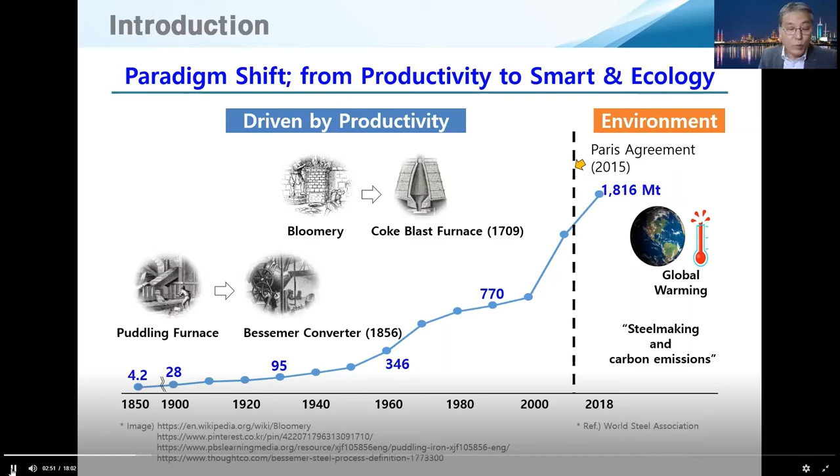Steel technology is facing the moment of paradigm shift. Definitely, environmental issues like global warming have become a crucial common issue. So what will be the innovation for the future in steel works?

Looking at the Korean steel industry, we are at the maturity stage. It is very difficult to find a growth engine for the future. In the Korean steel market, steel consumption is more than 1 ton per capita, the highest in the world.

Currently, crude steel production is about 71 million tons, but I think there will be no more growth in the future in terms of production capacity.

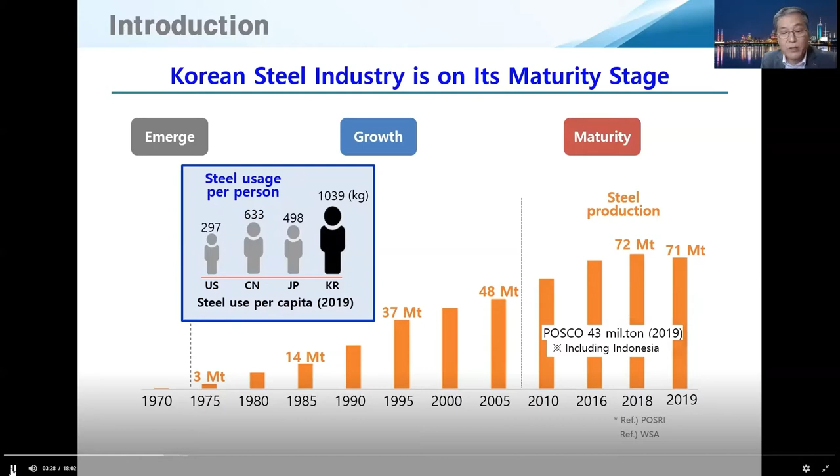In summary, let me tell you about 4 major challenges. Probably all steelmakers are in the same situation. First, global oversupply. Second, as I said before, we should follow environmental regulations to achieve carbon neutrality. And it is expected that the price of steel will increase when green steels come.

In safety, in spite of great efforts, the number of fatal accidents has not decreased significantly. Lastly, the baby boom generation are retiring, which means high-skilled operators or engineers are leaving soon. We are losing the know-hows in the workplace.

We need solutions that can solve all these problems, and smart technology can be one of them. That's the background of Smart Factory at POSCO.

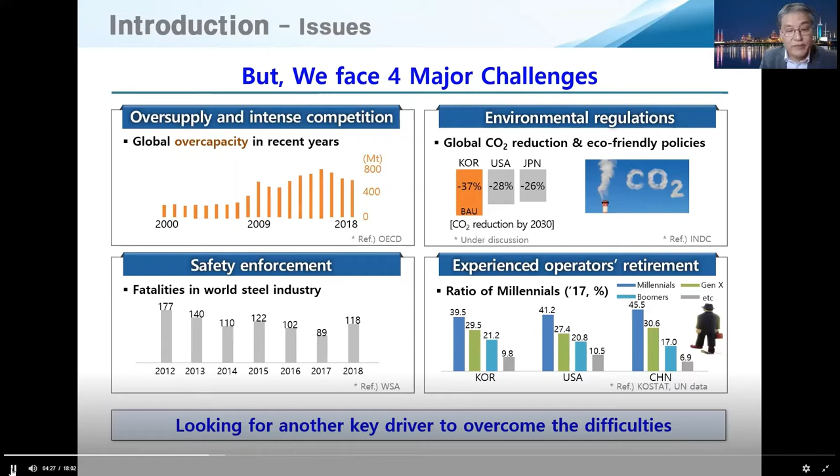Our definition of smart technology is combining domain knowledge and ICT technology, including AI. It will be creating new values and further building an intelligent steel mill.

The intelligent steelworks starts from sensing, in other words, creating and obtaining data. In our experience, in many cases, the key data needed to solve a problem can only be obtained by developing and installing new innovative sensors.

We need to have clean and quality data from the noisy and dusty mills. Big data, numbers like temperatures, including even pictures and voices, is the basis for machine learning. These data are the feed for AI algorithms that can make decisions for better performance.

By using these technologies, we would have autonomous operations in steel works. For example, automation in 4D tasks: dull, dirty, dangerous, and difficult, to minimize human operation.

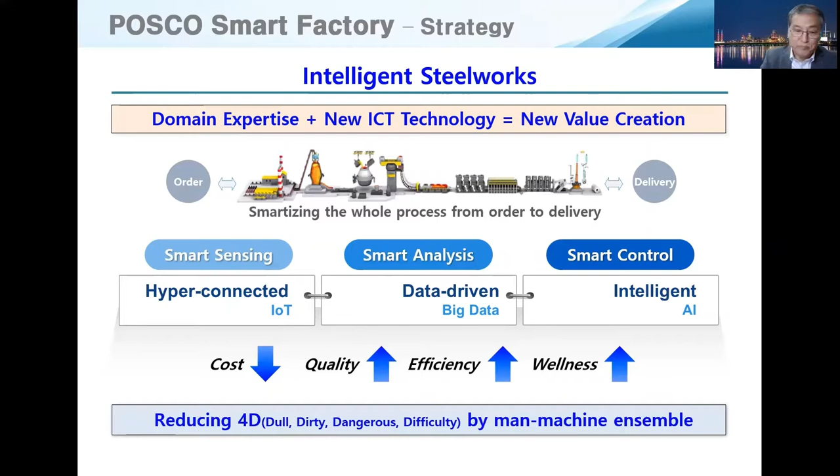POSCO has been applying AI models from marketing, manufacturing, to even safety. At first, we started 4 pilot projects and gradually diffused them to other sites. We are leading the AI technology for intelligent steel mills by continuously making success stories of these AI models.

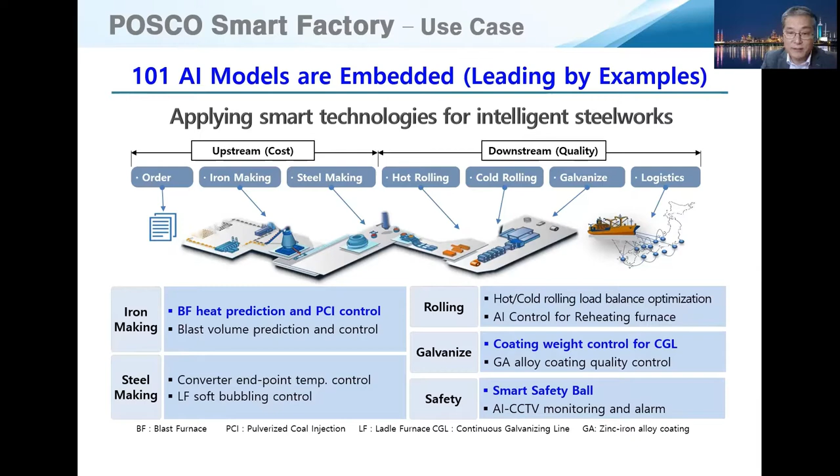As a first example, I will show you the Smart Blast Furnace project. 100% of blast furnaces were operated by humans, by operators' experience and intuition.

They have to think about raw materials, temperatures, air pressure, signals from blast furnaces. Too many things for human operators. Therefore, there is a deviation in operation depending on the level of operator's skill.

To overcome this, so many IoT sensors have been installed to obtain new data. Now we are automating blast furnace operation by generating high quality data on ore and coke quality, air volume, and coke usage ratio, etc.

We have also developed 5 AI prediction and guidance models. This makes it possible to always keep the blast furnace in a normal condition.

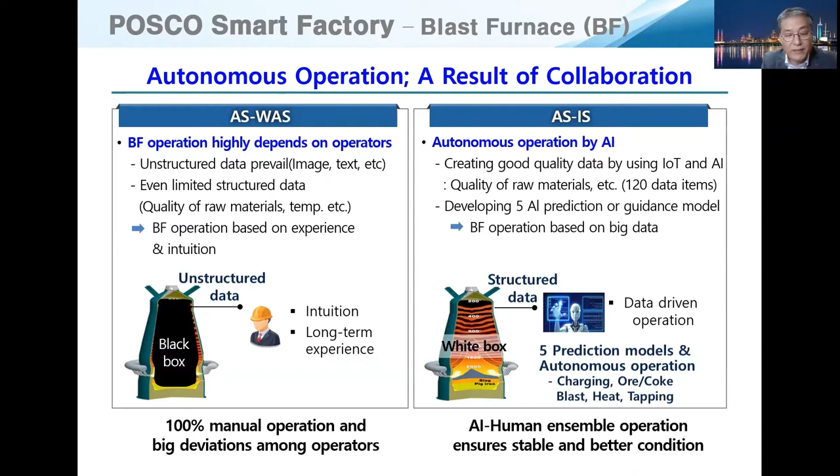During the development, we have realized that data quality is the key factor for autonomous operation. It's not algorithm, it's not the amount of data. If we have very nice and clean data, half of the whole work is done.

The success of the Smart Blast Furnace was possible because of active collaboration between engineers, researchers, SMEs, and universities. Steel manufacturers have domain knowledge, and AI algorithms come from universities. How to join them together is the key to finding a solution for having AI operators.

For sensing data, we have relied on SMEs who've got the sensor technology. It is found that Smart Blast Furnace has shown 5% productivity improvement, 1% cost reduction. It is noted that carbon dioxide has been reduced by 1%.

After finishing the Smart Blast Furnace project for a medium-sized one, new AI models are being developed for other blast furnaces. Further, operators are satisfied because their burden has been relieved a lot. Currently, these technologies are being applied to other bigger blast furnaces.

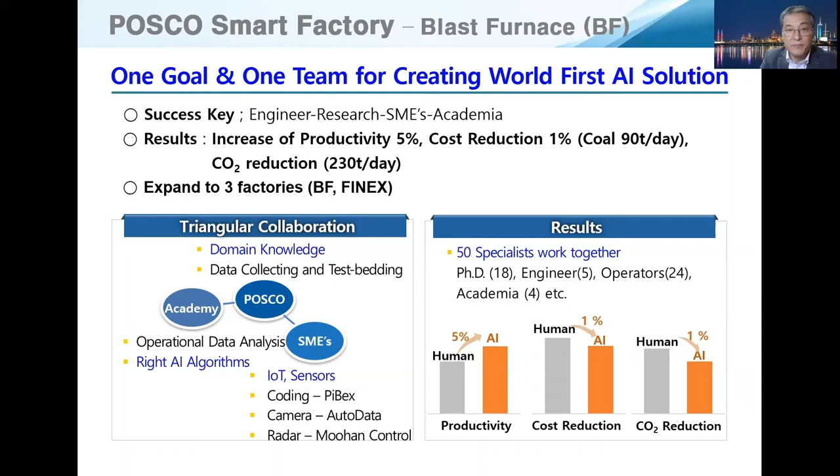Let me show you another project in downstream processes. Smart CGL, continuous galvanizing line, has been chosen for developing the AI model.

Hot dip galvanized steels are products in which zinc is coated with a thickness of 6 to 25 microns to prevent the corrosion of base iron. The coating thickness is controlled using an air knife device located near the molten zinc pot. The operators control the air pressure and gap of the air knife

to obtain steel strips with a desired uniform coating thickness. However, the time delay between measurement of zinc coating thickness and the operator's judgment of air knife conditions causes a non-uniform thickness of the zinc coating layer. This is because measurement of the thickness of the zinc layer is only possible after solidification. So the thickness measuring sensor should be installed almost 200 meters away from the air knife. There is always a difficulty in controlling the thickness of zinc layers. It's like blind driving without data.

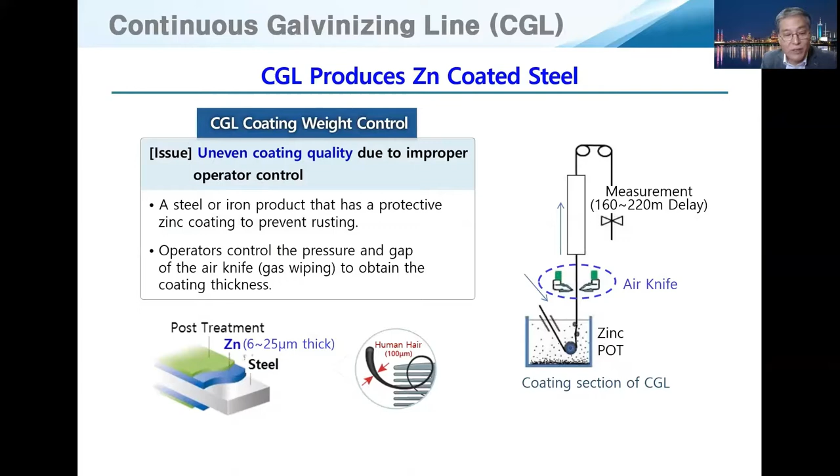So an AI model has been developed, first in the world, to predict the zinc coating thickness with high accuracy instead of human operators. After introducing AI models, the deviation of coating thickness has been reduced by 65%, and the amount of overcoating has been reduced a lot, by 50%, as a result of the better performance of AI operation.

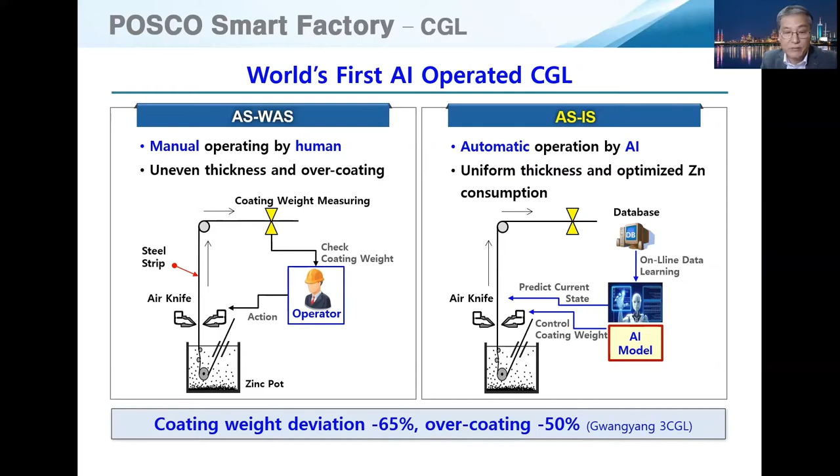After finishing the first project, all of the CGL lines have been connected by a system called AI Zinc Master. That is like a big brother for CGL lines. The AI Zinc Master system has controlled 14 factories around the world, and it improves the performance of AI models in all factories. That means one AI operator with global one quality.

Operators from China, India, and Mexico are just watching and monitoring. Globally, the same level of coating quality is obtained, and we can monitor AI's performance and upgrade the AI model by machine learning remotely. Let me draw your attention that we can reduce the material cost by up to 85% in the CGL in Mexico.

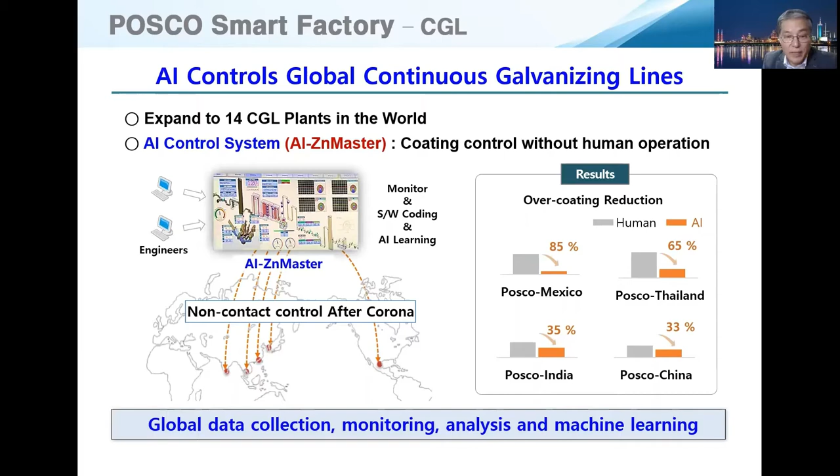In particular, I'd like to point out that under the COVID-19 situation, the global 14 coating lines are now being controlled remotely, without traveling or visiting factories in China, India, Thailand, and Mexico. Prior to COVID-19, it took 7 to 10 days of business trips and factory visits from Korea to Mumbai in India to solve on-site problems.

During the COVID-19 situation, data collecting and remote controlling by AI Zinc Master, almost in real time, can be possible without face-to-face meetings.

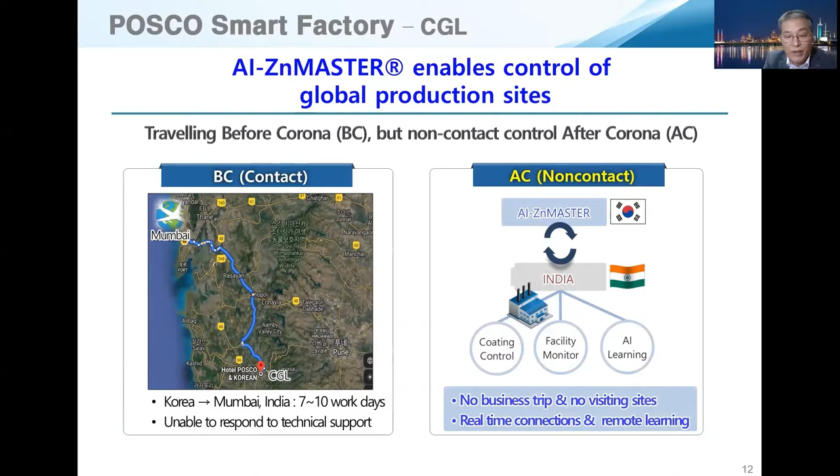Digital twins are also our main R&D activities. 3D-based design, VCS (virtual commissioning system), and VTS (virtual training system) are developed for engineering and education or training. It is expected to reduce engineering time and cost. These are the basis for building virtual factories synchronized with physical assets.

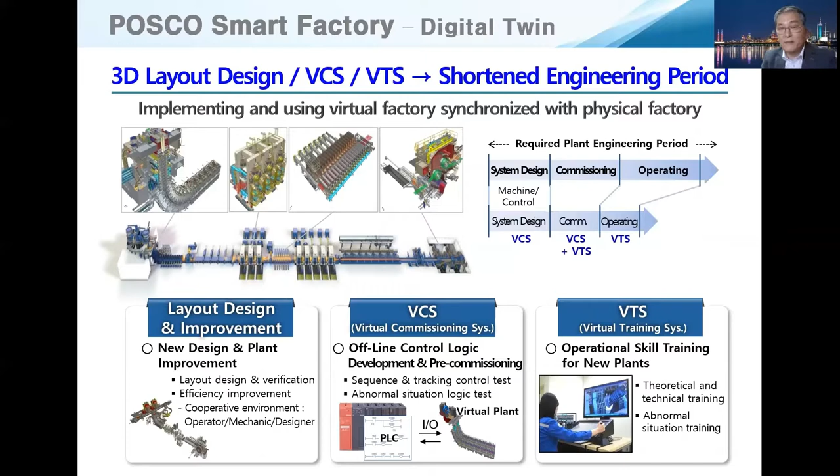Now I'd like to show you the smart predictive maintenance system called PIMS, POSCO Intelligent Maintenance System. This is developed to predict facility failures using AI technology equipped with various IoT sensors such as sound, video, thermal image, vibration, motor current, etc. We hope to have preventive maintenance before having failures.

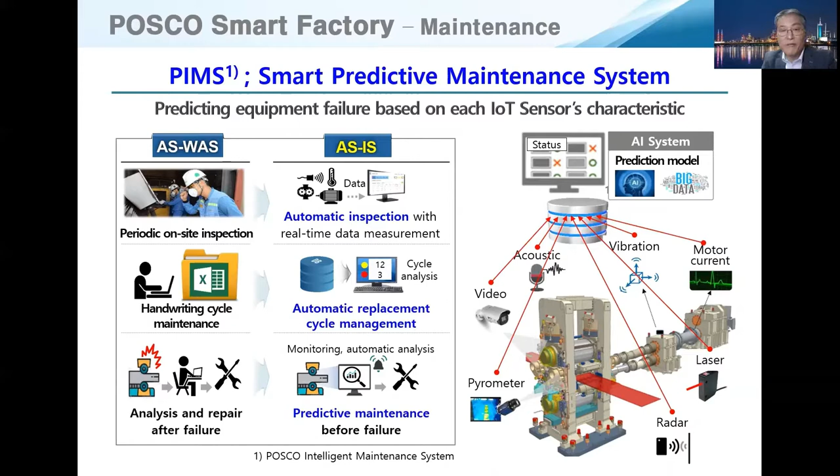Smart safety solution is one of the key tools for zero accidents in the workplace. As an example, I'll show you the smart safety ball that has been developed for 3 years. Before entering a confined area, people can throw or roll the ball into the hazardous space or room to detect oxygen, carbon monoxide, and hydrogen sulfide.

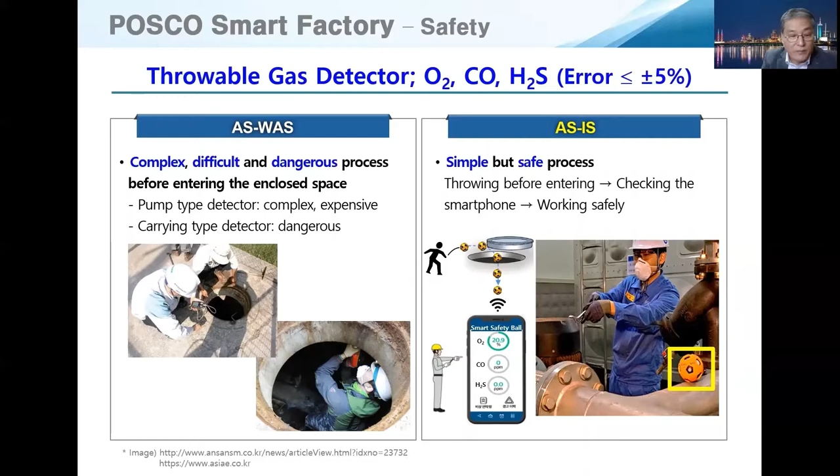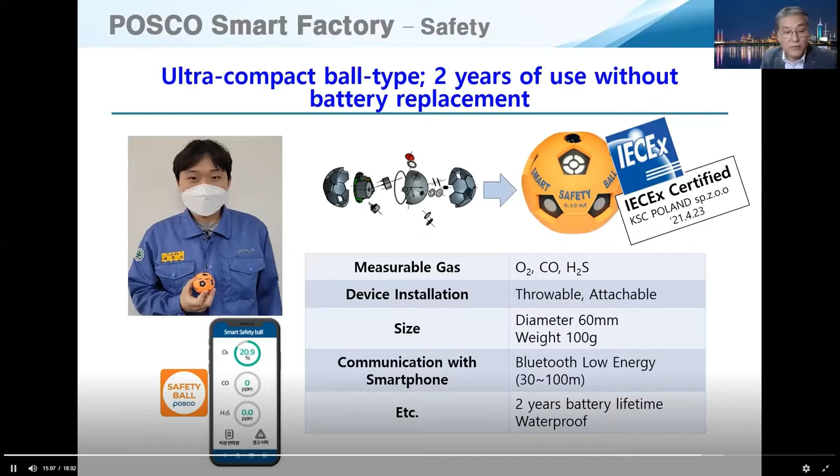This tennis ball sized smart gas detector can be used for 2 years without battery replacement by using BLE technology, Bluetooth Low Energy. Using a smart safety ball, it is now possible to detect gas before entering the enclosed space by checking the gas concentration displayed on smartphones. Imagine data can be received from a distance of 30 to even 100 meters.

The experience of 6 years and more than 100 projects of industrial AI proves that collaboration is the key to obtaining successful implementation. Universities have developed AI models, while SMEs have played the role of developing the right sensors to create the right data. POSCO, a steel manufacturer, has provided domain knowledge from experienced engineers and operators. This is the lesson we have learned.

AI is definitely a tool for the intelligent steelworks, but it's not almighty. We need to be more practical. Since AI models were first introduced, we have reviewed all the performances from operators and AI models, and we have learned and concluded that full automation using AI in the steel manufacturing process is not practical.

It is because data-based models are interpolating, not extrapolating, which means AI cannot cope with unexpected changes in operating conditions due to a lack of data. Therefore, human-machine ensemble operation and a physical and AI ensemble model is required rather than full automation by only an AI model in steel manufacturing processes.

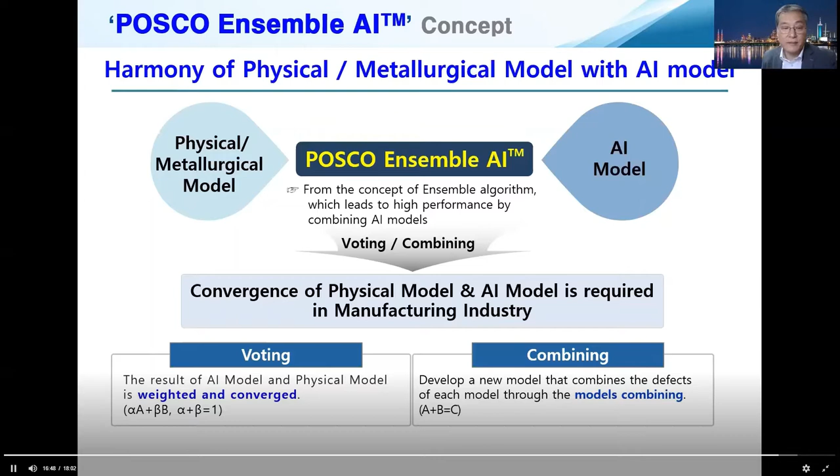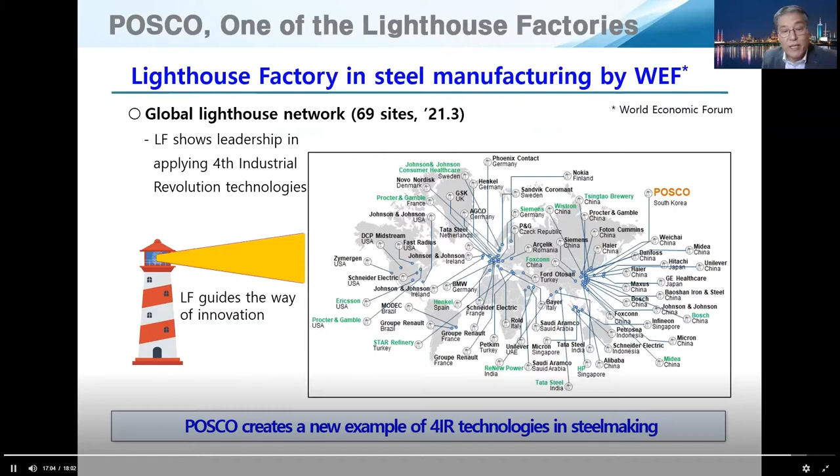Our efforts have been recognized, and POSCO was selected as a lighthouse factory by the World Economic Forum in 2019. And we will keep trying to lead the fourth industrial revolution technology in the steel manufacturing processes.

In summary, as I showed you, more than 100 AI models have been developed and are operating in the steelworks at POSCO. And we have learned that AI can be a part of the solution for smart factories, but full automation with AI in the steel manufacturing process is still far away.

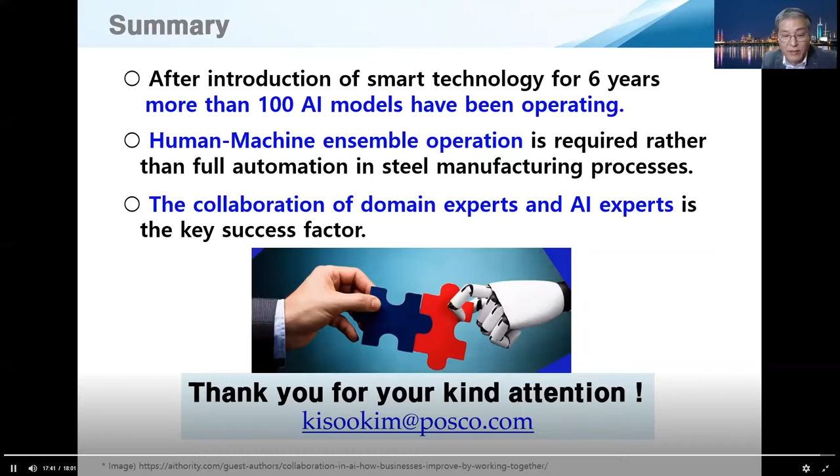Lastly, I'd like to emphasize that collaboration is the key success factor for building smart factories.